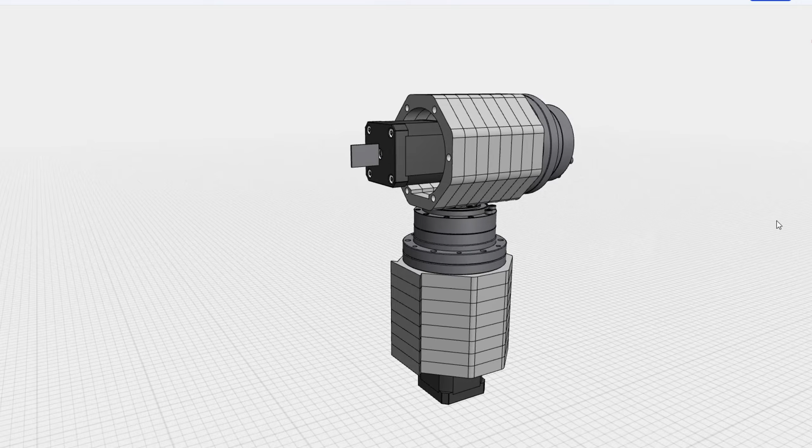Today we're diving deep into a project that's been my passion for the past year, my DIY harmonic drive mount for astrophotography. Grab a coffee, get comfortable, and let's embark on this astronomical journey together.

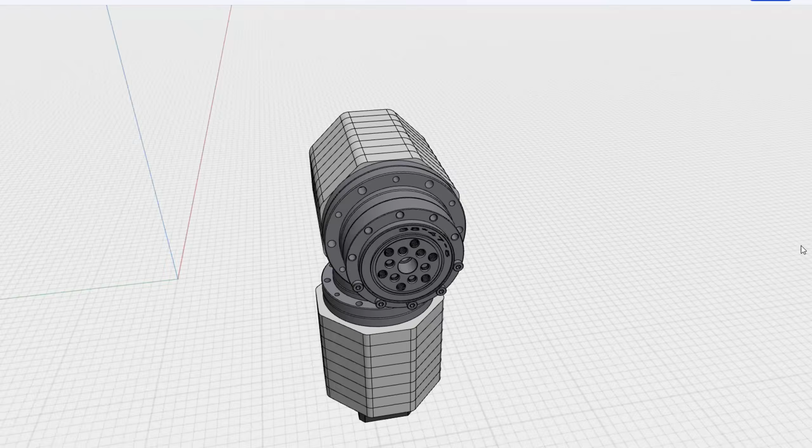First off, why build a harmonic drive mount? Well, it's a combination of passion, curiosity, and, let's be honest, a bit of a challenge to my wallet. I've always been fascinated by the precision of harmonic drive mounts. I remember drooling over the RST-135 by Rainbow Astro years ago.

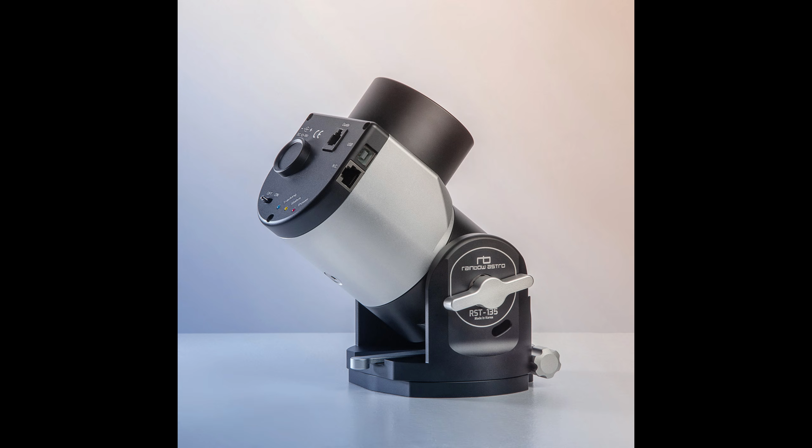But when I started seriously looking into building one about 2 years back, I hit a wall. The harmonic drives alone cost around €400 each. For a student like me, that was way out of reach. But here's the thing about us astrophotography enthusiasts. We're a persistent bunch, right?

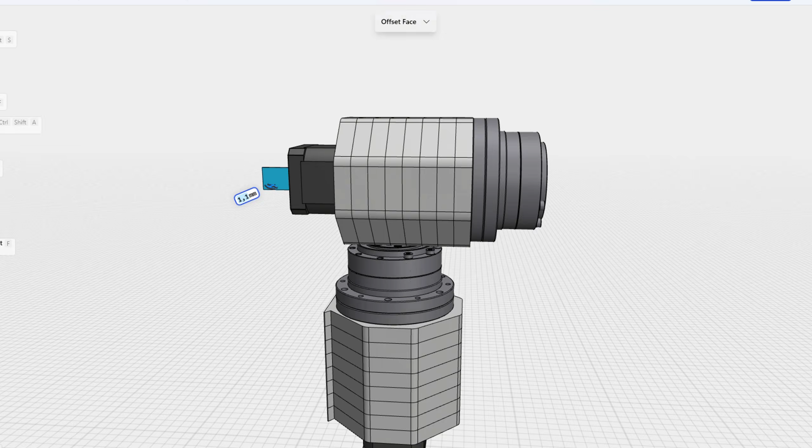Fast forward to August of this year. It's that magical time when we university students finally have a breather. Instead of binge-watching Netflix like a normal person, I found myself diving back into research on harmonic drives. And guess what? AliExpress came through. I found harmonic drives at a fraction of the cost. It was like the universe was saying, "Okay kid, here's your chance."

Now, let me walk you through the journey from that eureka moment to the final product. It all kicked off in September. Picture this, my desk covered in sketches, my computer running CAD software nonstop. I was knee-deep in calculations, trying to figure out the perfect reduction. After countless cups of coffee and probably a few gray hairs, I settled on a 100:1 ratio for both RA and DEC axes. Let's dive into the nitty-gritty of harmonic drives for a moment.

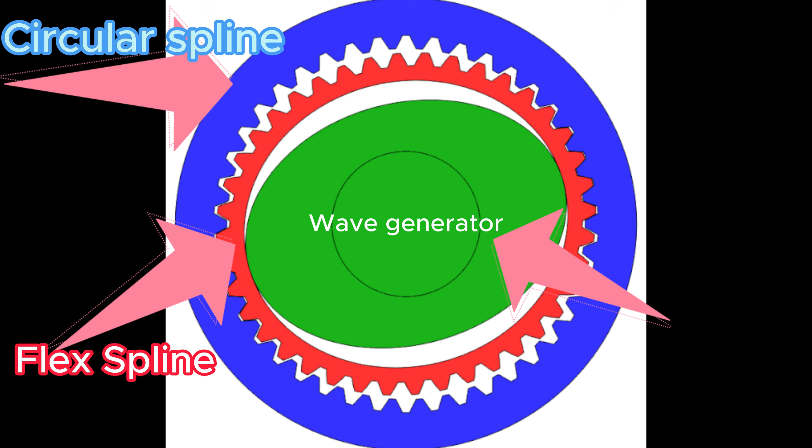For those unfamiliar, a harmonic drive consists of three main components: a wave generator, a flex spline, and a circular spline. The wave generator is an elliptical piece that rotates inside the flex spline, causing it to engage with the circular spline at 2 points. This creates an incredibly precise gear reduction. In our case, for every 100 rotations of the input shaft, we get just 1 rotation of the output. This level of precision is crucial for tracking celestial objects across the night sky.

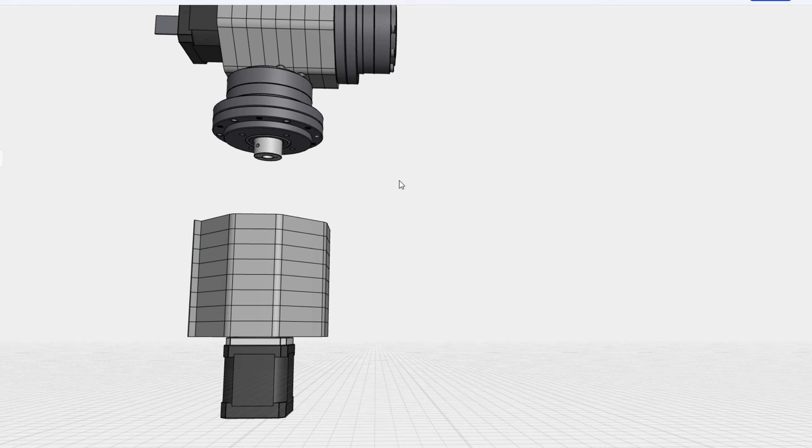Then came the design phase. Initially, I was all set on making a cylindrical design, inspired by the sleek look of the Sharpstar Mackay. But here's a pro tip. Sometimes, practicality trumps aesthetics. I switched to an octagonal design. Why? Well, try drilling precise holes in a curved surface without specialized equipment. Not fun. The octagon gave me flat surfaces to work with, making the whole construction process much more manageable.

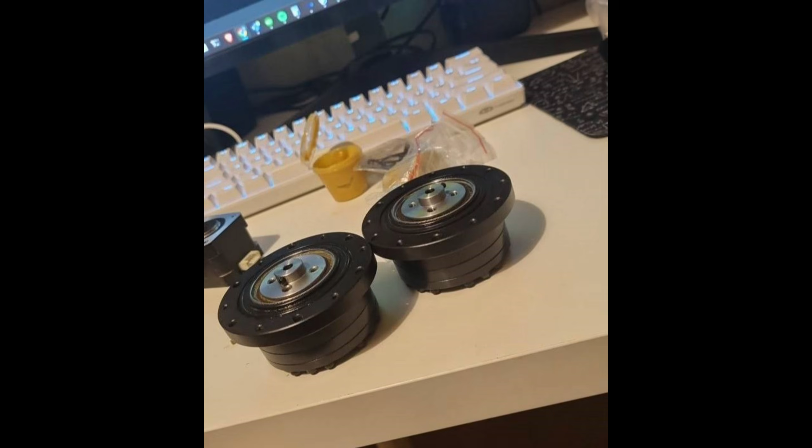November rolled around, and with it came Black Friday. Now, I know what you're thinking. Black Friday is for buying gadgets you don't need, right? Well, not for this astronomy nerd. I snagged those harmonic drives and all the electronics I needed. It felt like Christmas came early.

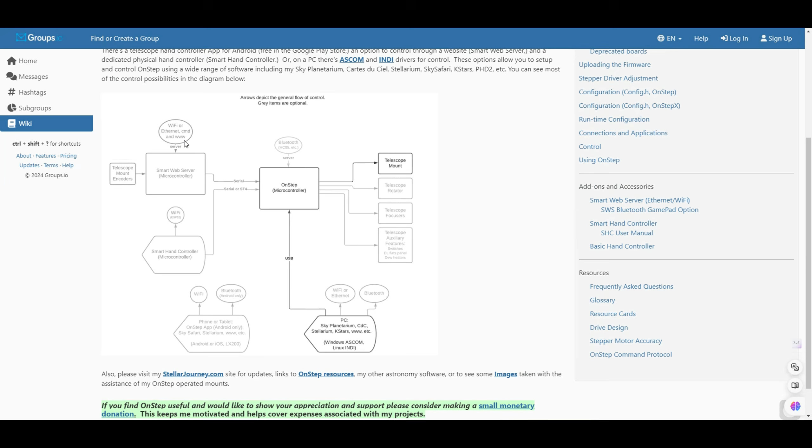Let's talk about the heart of the mount, the electronics. I based everything on the OnStep software. If you're not familiar with OnStep, it's this incredible open-source telescope controller system. It's like the Swiss Army knife of mount control. For the brain of the operation, I chose a FYSETC E4. Why this board? Well, it's commonly used in 3D printers, which means it's robust, well-documented, and bonus point, affordable.

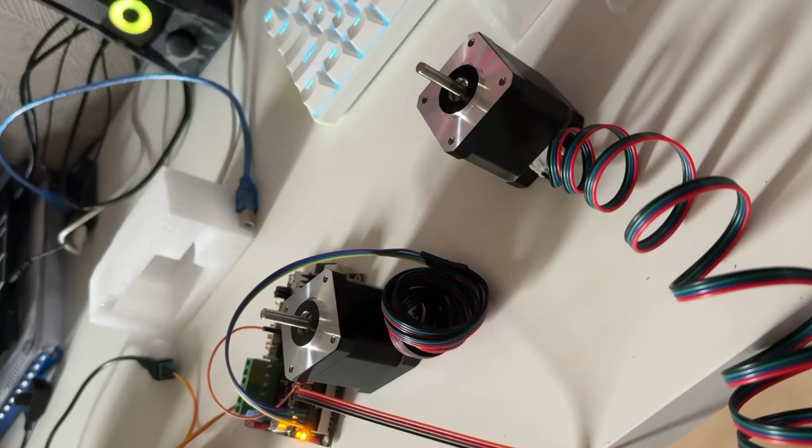Now, assembling the electronics was an adventure in itself. Picture this, me, surrounded by wires, stepper motors, and driver boards, feeling like some mad scientist. The key components? 2 NEMA 17 stepper motors, one for RA, one for DEC. These aren't your average stepper motors, mind you. I went for high torque versions to ensure smooth movement even under load.

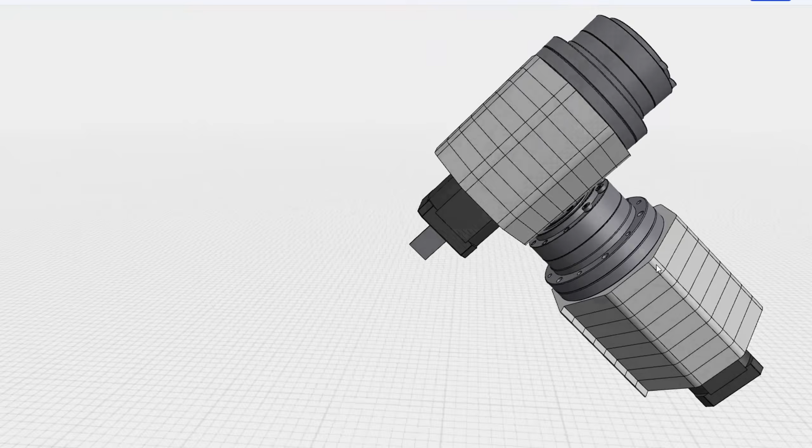Connecting everything was like solving a puzzle, but with the potential for small explosions if you get it wrong. No pressure, right? But here's the beauty of it. Once you understand the basic principle, it's quite straightforward. Power goes in, signals go out to the motors, and a USB cable connects to your laptop for control. Simple in theory, slightly more nerve-wracking in practice.

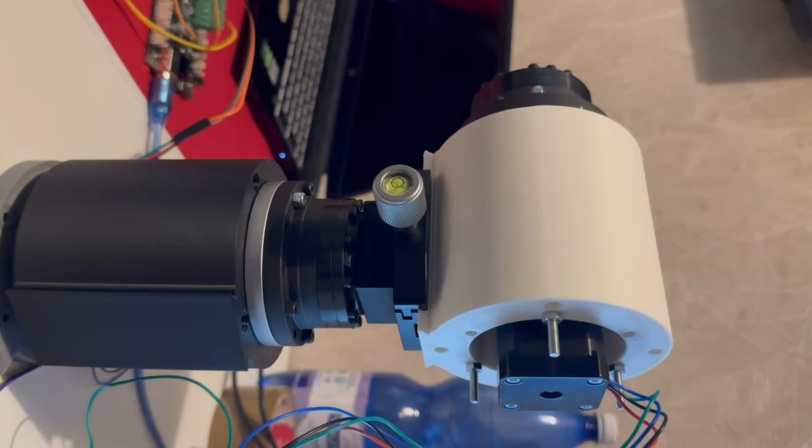One of the biggest challenges I faced was tuning the stepper motor drivers. These little chips control how much current goes to the motors, which directly affects their performance. Too little current and the motors don't have enough torque.

Too much, and they overheat. I spent days tweaking these settings, using an oscilloscope to monitor the current waveforms. It was a delicate balance between performance and reliability.

Let's move on to the mechanical assembly. This is where things got hands-on. I started with 3D printed parts for prototyping. Pro tip: always prototype with 3D prints before moving to metal. It saves you a ton of headaches and materials.

The main challenge was ensuring everything aligned perfectly. Even a millimeter off, and you can kiss smooth tracking goodbye. After several iterations, and I mean several, my 3D printer was working overtime. I finally had a design I was happy with.

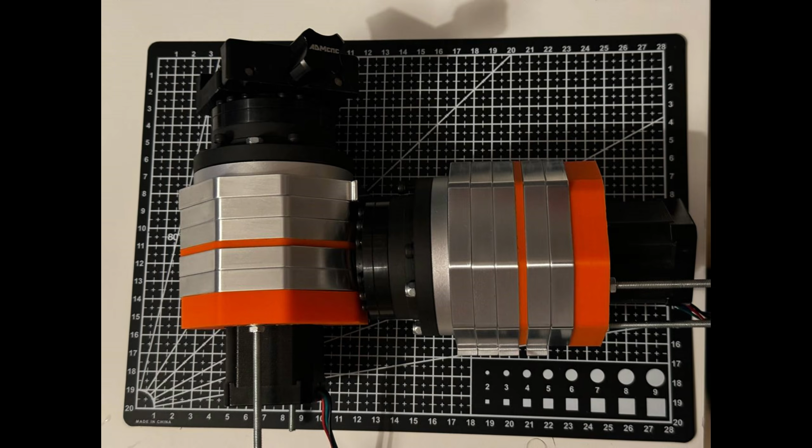Then came the upgrade to aluminum. I used a local laser cutting service to get my parts cut from 10mm aluminum plates. The precision was incredible. We're talking tolerances of less than 0.1 millimeters. Assembling the final version was like putting together a high-stakes puzzle. Each harmonic drive had to be perfectly aligned with its stepper motor.

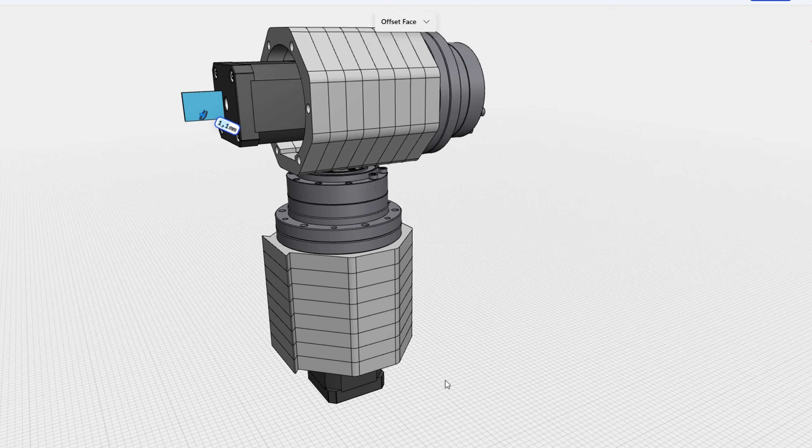One aspect I haven't mentioned yet is the NEMA 17 reduction gear system. While the harmonic drives provide the main reduction, I added a stepper inline reductor on each axis for additional reduction and to act as a clutch mechanism. Designing and implementing this system was a project in itself, but all that effort paid off when it came time

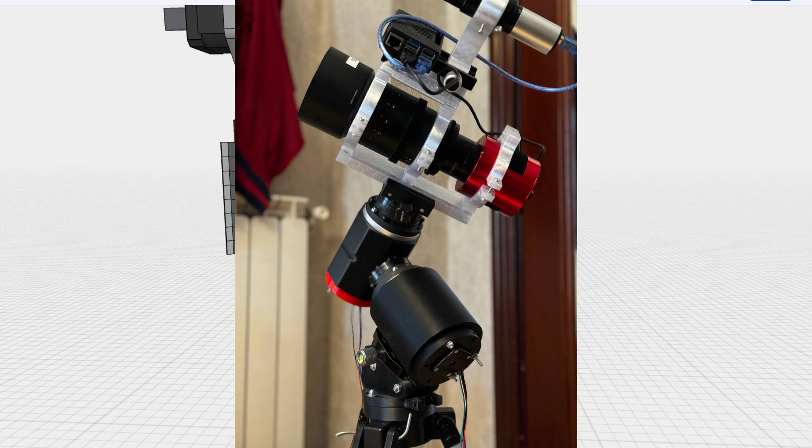for testing. I loaded up the mount with my imaging rig, an ASI 585 camera, a Samyang 135, and a small guide scope, which, by the way, is another DIY project I'll tell you about in a future video. The moment of truth came on a clear night last month. I started with short exposures, 30 seconds, then 60, then 90. The stars were pinpoints. The guiding error was consistently under 1 arcsecond. For a DIY mount, this was beyond my wildest expectations.

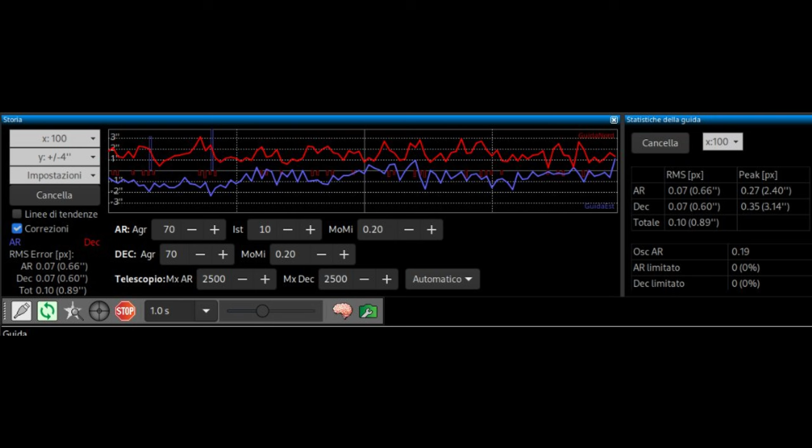Now, I know what many of you are itching to ask. What's the damage to the wallet? Well, the total cost came to about €650 or roughly $700. This includes everything except the tripod and equatorial wedge. Is it cheap? Not exactly, but considering commercial mounts with similar performance can run into thousands, I'd say it's a bargain. Let's break down the costs a bit more.

Harmonic drives, €300. Stepper motors, €100. Electronics, SKR board, power supply, etc., €50. Aluminum parts and machining, €170. Miscellaneous, bearings, screws, wires, etc., €30. Of course, this doesn't account for the countless hours of work put into research, design, and assembly. But for me, that time was an investment in learning and personal growth.

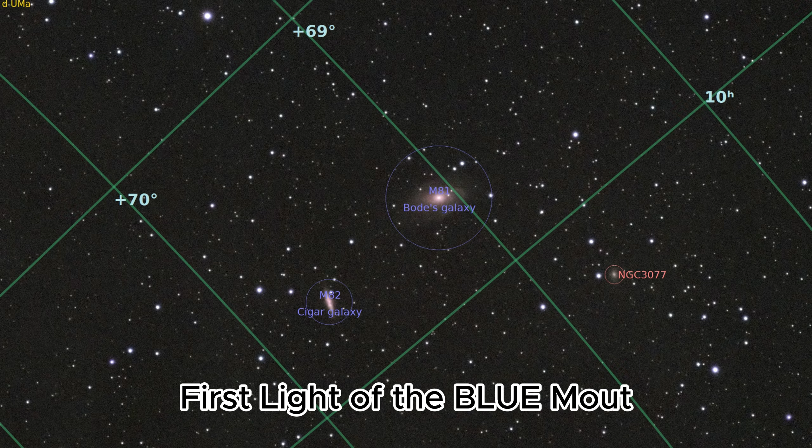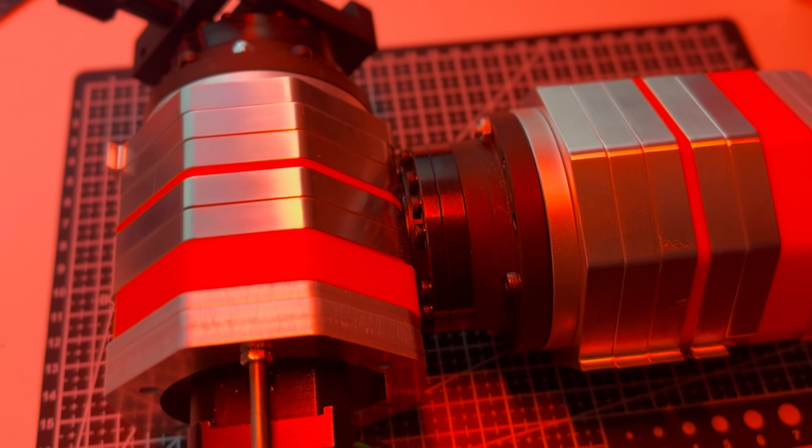Looking ahead, I've got some ideas for future improvements. I'm considering adding encoders to both axes for closed-loop control. This would allow the mount to detect and correct any missed steps, potentially improving tracking even further. I'm also toying with the idea of 3D printing a lightweight carbon fiber reinforced housing to replace the aluminum one, which could significantly reduce the overall weight.

Before I wrap up, I want to emphasize something important. This project isn't just about saving money or showing off DIY skills. It's about understanding the technology we use in our hobby at a deeper level. Every time I use this mount, I feel a connection to the stars that goes beyond just observing. I built the machine that's helping me explore the cosmos. How cool is that?